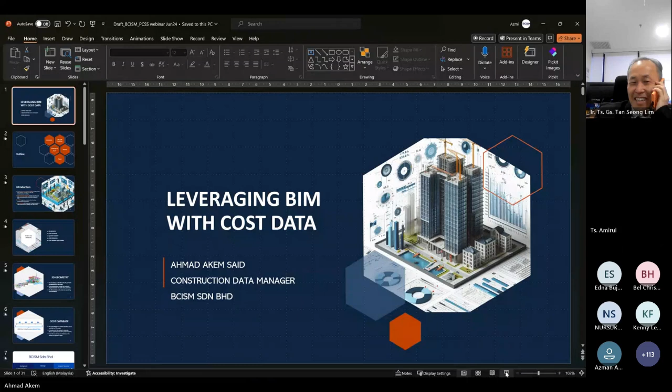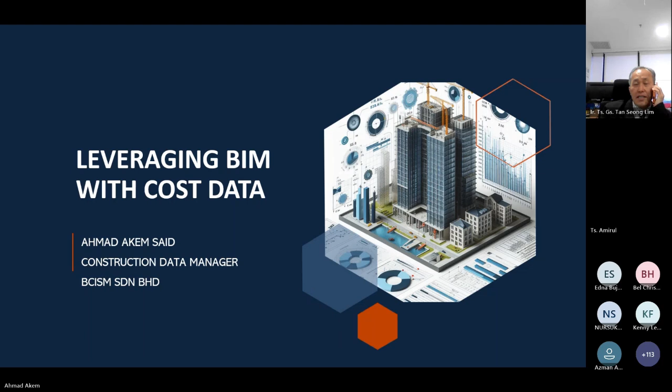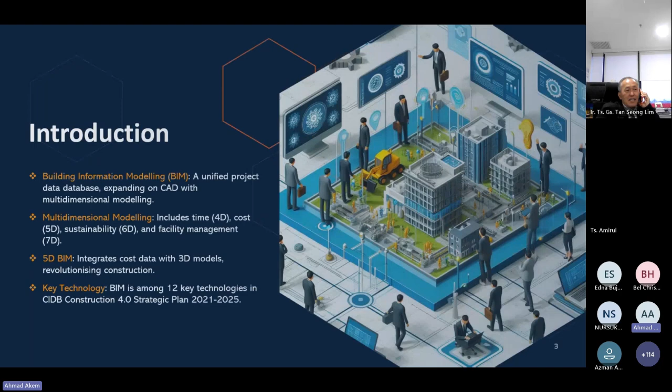So for the introduction, ladies and gentlemen, Building Information Modeling, or BIM, is a platform where every detail of the construction project from start until completion is captured in the 3D model. So it is a platform where every stakeholder, from architect to engineer, from contractor to client, can access, understand, and contribute to a living database of the project information.

So BIM is not just the upgraded version of the previous computer-aided design solution. It adds intelligent data and enables multi-dimensional modeling, and the elements of time, cost, sustainability, and facility management, referring to 4D BIM, 5D BIM, 6D BIM, and 7D BIM. So they are the dimensions that we can visualize, simulate, and analyze to make better decisions and improve our project.

And the arrival of 5D BIM has mostly transformed the construction industry by integrating the cost data with the 3D model. And in Malaysia, CIDB, or the Construction Industry Development Board, has recognized BIM as one of the 12 key technologies in the Construction 4.0 strategic plan. So this BIM technology is expected to significantly transform the construction industry. And do you know that the first case of BIM in practice can be traced back to the 1970s, and it was first introduced to the Malaysian construction industry in 2007.

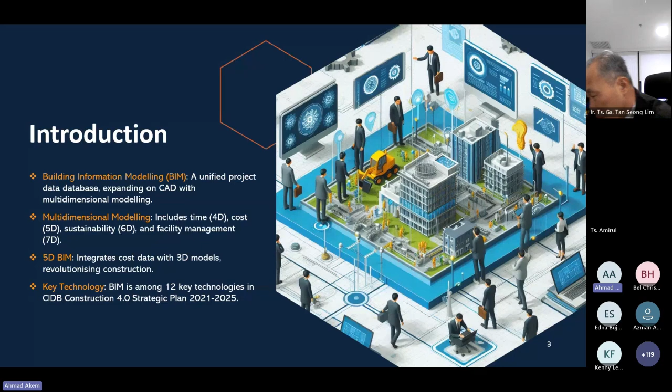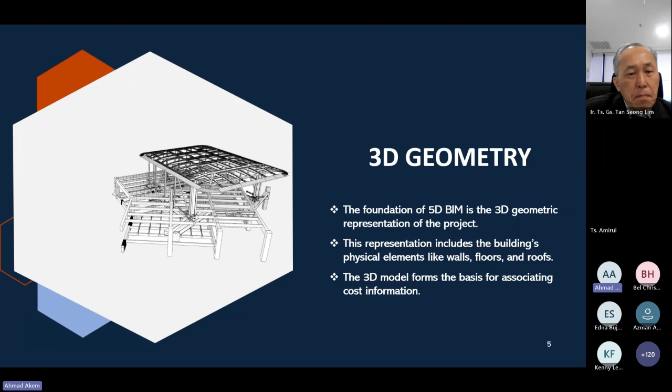So like I said, this is not just a fancy 3D model. It is a detailed, comprehensive representation that is used for visualization, analysis, and simulation. So imagine that we are able to walk through our building before a single brick is laid. For me, it's pretty cool. So why is the 3D geometry so powerful? Because it allows us to visually present complex ideas.

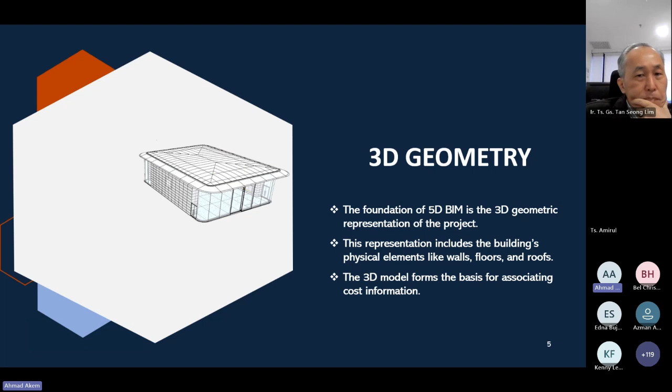So have you ever tried explaining a complex design over a phone call? It's very difficult, right? It's like trying to describe a certain color to someone who has never seen it. So with the 3D model, everyone can see the same picture. It's also great for simulating various scenarios and detecting potential conflicts before they become costly mistakes.

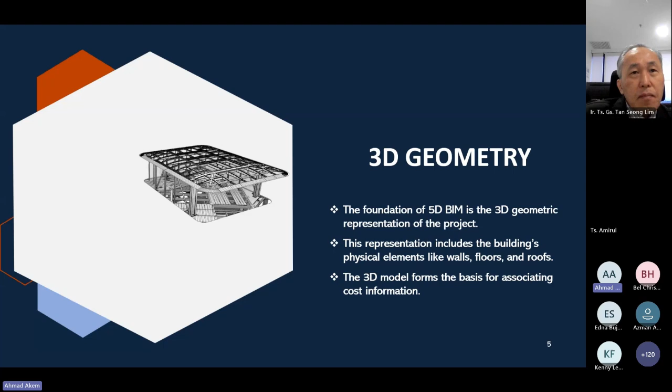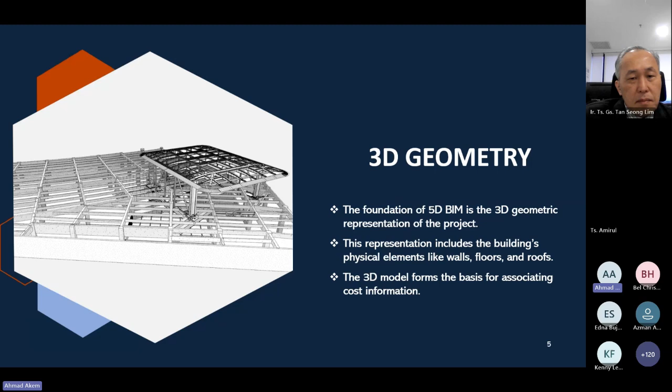So one of the best parts of the 3D geometry in BIM is that it can enhance communication and collaboration. So imagine all the architects, engineers, QS, and contractors looking at the same detailed model. It's like everyone being on the same page of a complex book rather than each of us reading a different translation. So I'm sure that this will lead to better decision making and reduce misunderstanding.

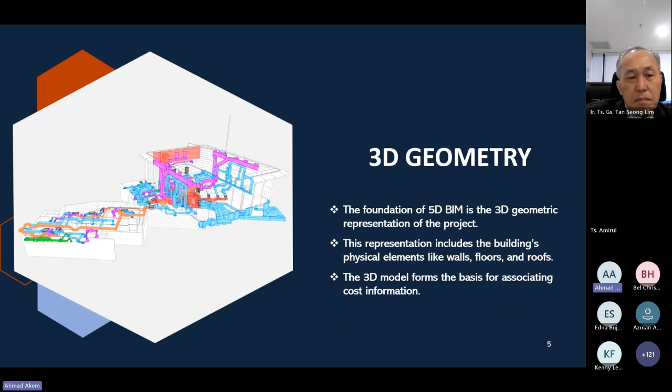So like I said, 5D BIM is where we integrate the cost and time dimensions into the 3D model. In other words, we are adding a layer of data that not just shows what our building will look like, but also how much it will cost and how long it will take to build. So the next one is the 3D geometry. We start with the 3D model, which gives us the project geometry. And then we add the time dimension and finally the cost dimension for 5D BIM.

So one of the critical components of 5D BIM is the cost database. This database includes detailed information on construction costs, such as material, machinery, equipment, and labor costs, and so on. So it's like having a financial encyclopedia for our project. The cost data in 5D BIM is usually linked with the BQ, bill of quantities, and it should be updated in real time.

So imagine that we are able to adjust our project budget instantly as changes occur. It's like magic, right? It also means that we can track our cost performance and generate various cost reports. So one of the standout benefits of 5D BIM is the ability to evaluate the cost in real time. This means that any changes in the design or during construction can be immediately reflected in the project cost and schedule.

So next, now we go back to the main elements of 5D BIM. So the next one is the quantity takeoff. So quantity takeoff is a process of calculating and extracting the quantities of material needed for the construction project. So 5D BIM automates the quantification of components like the slab, the beam, column, wall, and so on. So this means that all the calculations are based on the exact parameters of each element, and it is very detailed. So imagine that we are able to extract all the necessary quantities with just a few clicks. So no more manual measurement.

So the advantages of automated quantity extraction in 5D BIM are many, and specialized software such as CostX and the like make the process efficient and less prone to human error. So these tools usually have the feature to automatically generate the BQ, bill of quantities, listing all the material, the labor, machinery needed, and so on. And with 5D BIM also, the process is not only faster, but also more accurate. So this is beneficial for large scale projects with extensive material requirements. And by reducing the manual process and minimizing the error, we can save time and money.

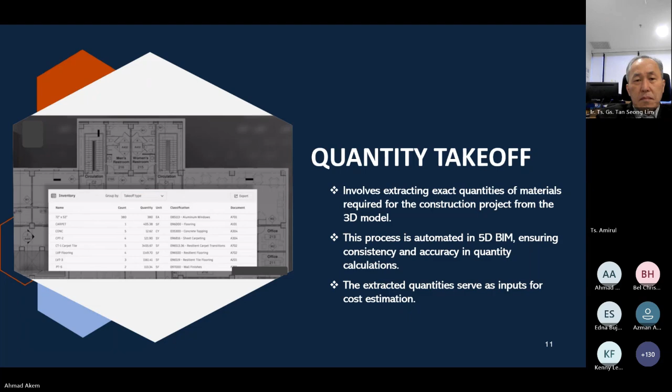And one of the standout features of 5D BIM is its dynamic updating capability. So any changes in the design are immediately reflected in the quantity takeoff. So this will help the stakeholders to understand the financial implications of the design choices. And the 5D BIM tools also can produce detailed reports with financial metrics, providing a transparent overview of the project's financial health at any stage. So who doesn't want that kind of insight, right?

So the next one is the cost estimation. So cost estimation in 5D BIM is not just about assigning the price tag. It's about bringing precision and efficiency to the forefront of the project planning. So we achieve this by assigning the cost to the quantities that are derived directly from our model. So, but where does the cost come from? So it can be based on predefined cost rates or a customized cost database, such as using the NRC, that are adapted to the specific project needs.

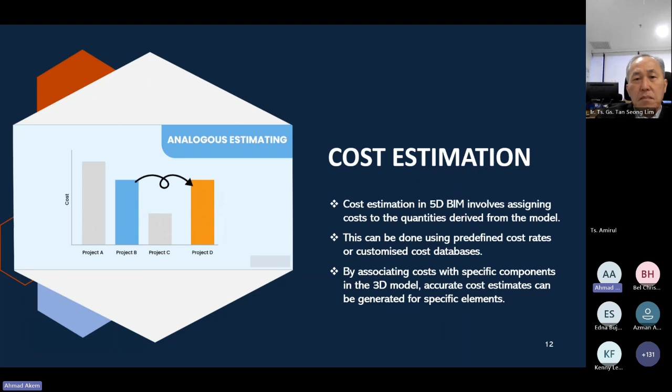So now try to think about the components of the building. So each beam, the window, the pipe are more than just a physical structure. It is a cost factor. So in 5D BIM, we associate this cost with the specific component in the 3D model. It means that we can generate the cost estimate for the entire project, or we can zoom in on a specific element. So can you imagine the level of detail and control that 5D BIM gives to us? So with precise cost estimation, we can make informed decisions. Of course, I believe we can anticipate potential financial pitfalls, and also we can adjust our strategy accordingly.

The next one is cost control, cost tracking and control. Traditionally, tracking and controlling cost has been a challenge, but with 5D BIM, we have a dynamic tool. This innovative approach integrates cost calculation directly with the 3D model to ensure that any changes to the design or the associated cost data are automatically updated.

Imagine being able to monitor cost deviations as they happen, and compare actual expenditure against our initial estimate, then implement corrective measures. This level of control is very crucial. The implication is it can lower the chance of error, and we can have a more effective financial management strategy.

I believe everyone here has faced unexpected cost overrun in a project, right? It's a common issue, but with 5D BIM, it provides us with insight to take preventive measures. By offering insight into the project costs at various stages, I believe we can anticipate and mitigate risks before they escalate.

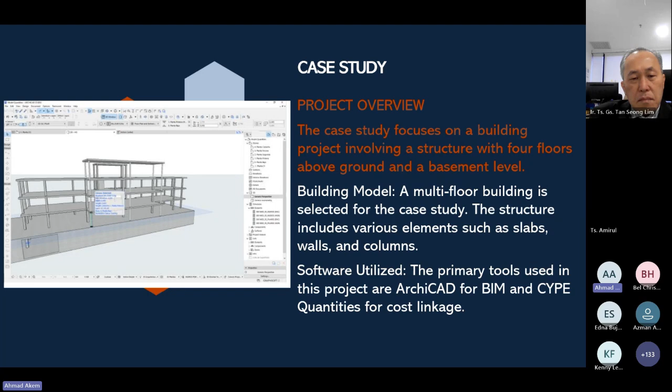Now I will explain what they are doing in this case study, what the process is. The first one is they do parametric modeling in the BIM.

Parametric modeling involves creating a detailed digital representation of a building with specific parameters for each element. In this case study, they use ArchiCAD to generate the parametric model of the building structure. Detailed elements like the reinforced concrete structure were modeled with specific parameters such as material type, section dimension, and others.

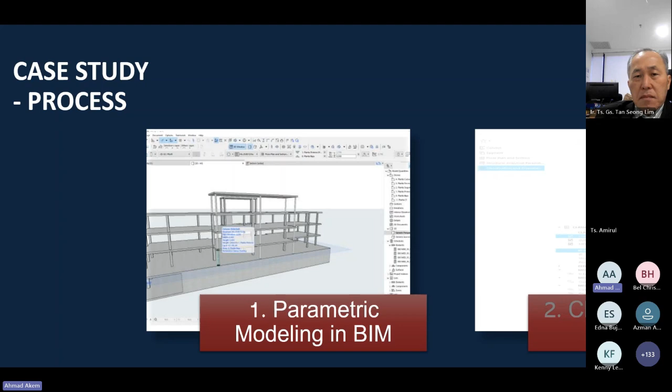The next step is in ArchiCAD, the properties were managed and parameterized to generate the cost and description necessary for the cost database. Different categories for quantity were created to ensure that each parametric element was automatically assigned the appropriate properties based on its classification.

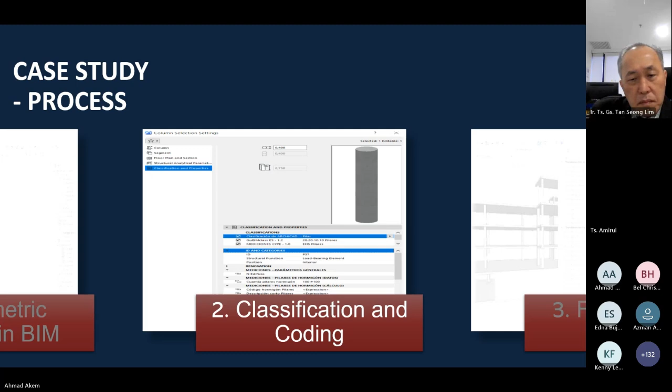After they complete all the BIM model, all the parametric model, with all the descriptions, next they exported the BIM model as an IFC file, Industry Foundation Classes file, to ensure compatibility with other software tools.

The exported IFC file, they also reviewed it first, to ensure that the cost data structure and the categorization is correct.

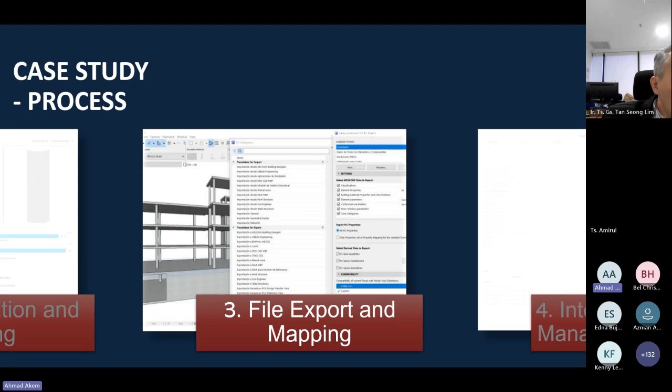What they do next is they use the CYPE Open BIM Quantities software to link the structural BIM model to the budget items. In CYPE Open BIM Quantities, they use a rule-based system to identify the BIM elements by characteristics such as classification, material, and geometry.

This is all to ensure consistency in the cost relationship between the software, between the BIM model and the cost management software. Lastly, when everything has been linked, the units extracted from the BIM model will automatically link to the cost database. This automatic link will enable the automatic generation of the budget, reducing manual effort and minimizing error in budget creation.

In the CYPE Open BIM software also, they created a detailed cost database of items to help the automatic connection of these items with the corresponding elements in the BIM model.

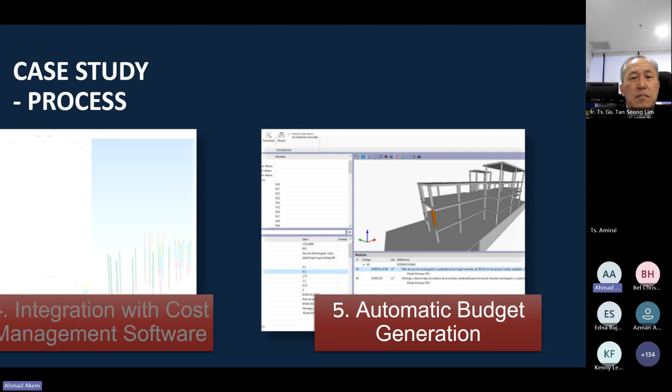Next, let's look at what we can learn from the case study that I showed.

The first one is that by automatically linking the BIM element to the budget item, we can significantly reduce the error and inaccuracy that are common in manual quantification and cost management. Imagine the headache we can avoid by minimizing human error.

The next significant benefit is time saving. The automated generation of the budget can save significant time and effort, allowing us to be more efficient in project planning and management.

The next one is that the structured and parameterized data within the BIM model can ensure that all the elements are correctly interpreted and utilized by the cost management software. This can maintain data integrity throughout the project lifecycle.

The next one is that by following classification standards or systematic data management practice, you can ensure consistency in data handling across different stages of the project. So standardization is the key to efficiency and reliability.

And the last one is that by using the open BIM environment, it can promote better interoperability and collaboration among the different stakeholders. I believe this can enhance the overall workflow and ensure that everybody is on the same page.

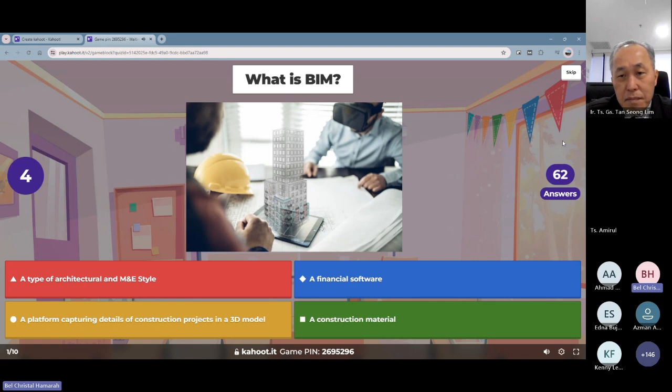What is BIM? You have 30 seconds to answer. Fifteen seconds left. Okay, so the answer is a platform capturing details of construction projects in 3D model. Let's see who's in first place. We have Dina.

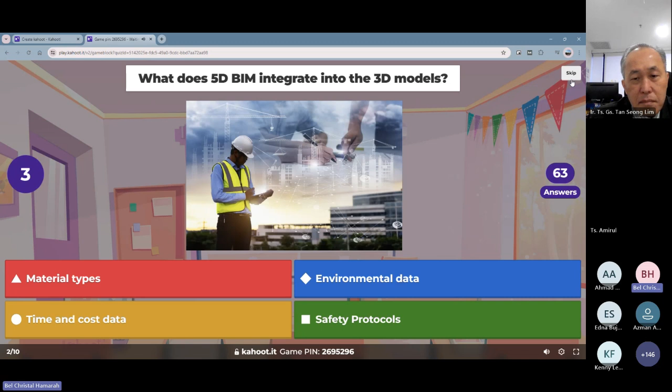Ready for the second question? What does 5D BIM integrate into the 3D model? Will it be material types, environmental data, time and cost data, or safety protocols? You have 10 seconds to answer. And the answer is time and cost data. Let's see who got this round. We have ASZ. He's in first place currently, with Alif Roadway in second and Aruf Fag in third place.

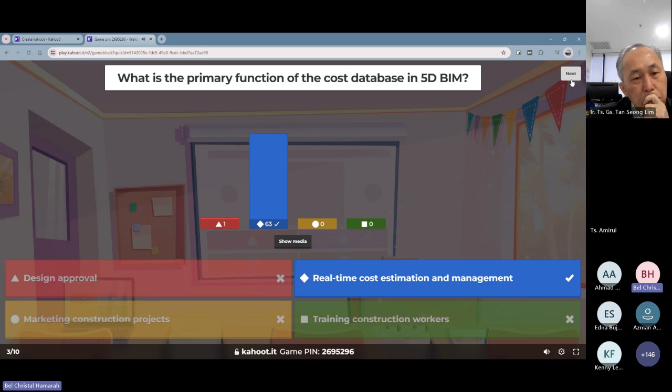Let's go to the next question. What is the primary function of the cost database in 5D BIM? 30 seconds. Is it design approval, real-time cost estimation and management, marketing construction projects, or training construction workers? There's only one answer, so choose wisely. 10 seconds to go. The correct answer is real-time cost estimation and management. Everyone got it correct except for one. Let's see who's in the lead. ASZ is in the lead.

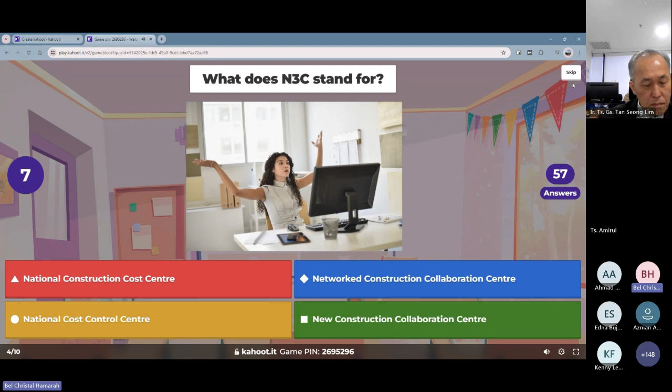Next question, fourth question. What does N3C stand for? Is it National Construction Cost Center, National Cost Control Center, Networked Construction Collaboration Center, or New Construction Collaboration Center? What's the answer? The answer is National Construction Cost Center. We have 28 who got it right and the rest got it wrong. Let's see who's in first place now. We have Alif Roadway with 3,789 points.

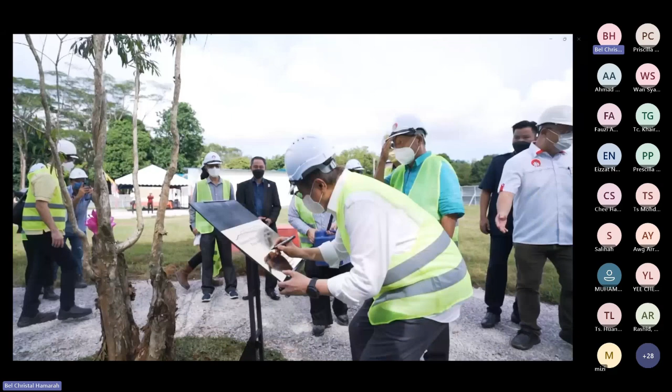I think it's only right that Sarawak must have this archive. Very, very important because we have a long history. Purpose of the archive is the conservation of documents for future information, not just for now.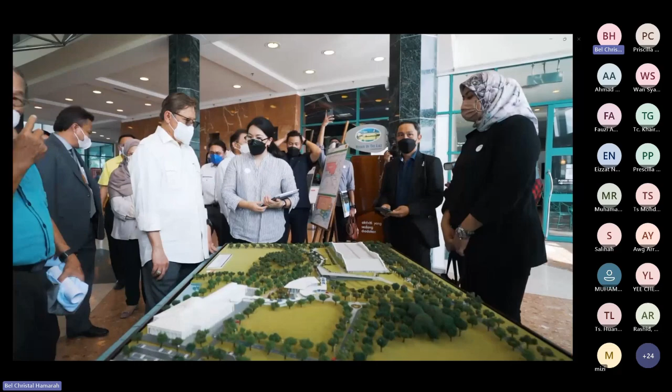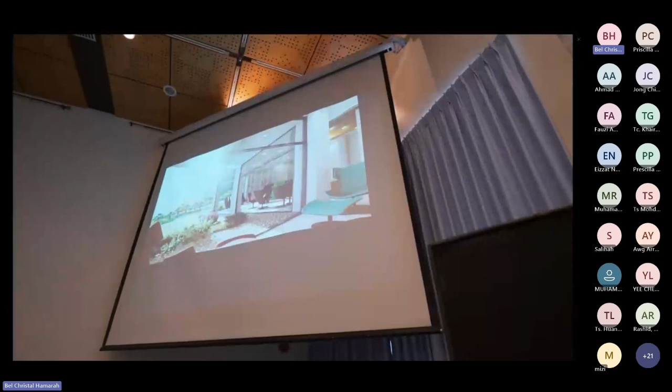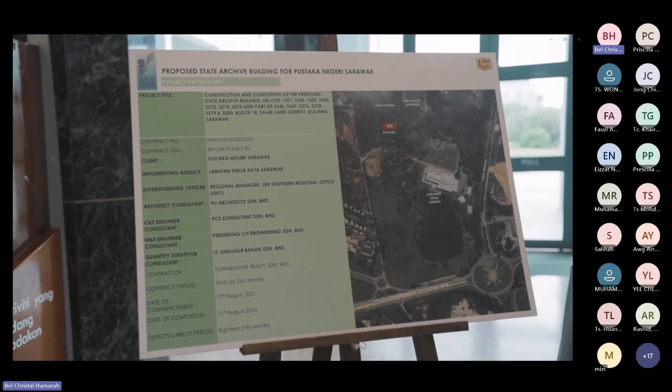The Right Honorable Chief Minister of Sarawak, accompanied by Chairman of Pustaka Negeri Sarawak, for a virtual tour on stage. So this archive, they can also work with the museum. The architecture of this building is friendly to environment. People say the present is determined by the past and the future will be determined by the present.